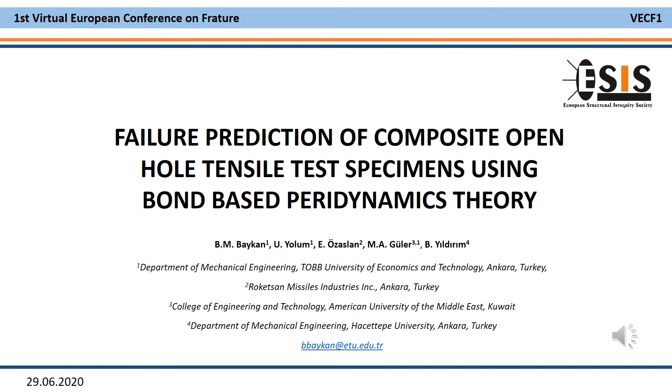Welcome to my presentation about failure prediction of composite open-hole tensile test specimens using bond-based peridynamic theory. First, I'm going to talk about studies done in the literature. Then I will tell you about the objective of the study, and I will continue with the method used for the solution, results, then discuss the conclusion, and finish with future work.

Peridynamics is a non-local theory introduced by Silling in 2000. A non-local theory is that a material point is affected by material points located in a region of a finite radius. Basically, peridynamics is a reformulation of the equation of motion in solid mechanics. The theory uses spatial integral equations, which make it easier to model discontinuities. The original peridynamic theory, invented in 2000, has been later called bond-based peridynamics.

Then Oterkuş and Madenci have presented an application of peridynamic theory to predict how damage propagates in fiber-reinforced composite materials under mechanical and thermal loads. Problems have been analyzed in fiber direction and arbitrary directions. Therefore, two peridynamic bond constants have been determined for each direction. Failure mechanisms such as matrix crack, fiber breakage, and delamination were examined. They came to the conclusion that peridynamic theory is successful for failure analysis of composite materials.

Kilic et al. did research on peridynamic theory using 2-ply and 3-ply laminates with different lamina orientations with a center crack. The peridynamic results were validated with experimental data. The failure mechanisms, matrix crack, fiber breakage, and delamination were captured by the prediction. The reported experimental results showed the ability of the peridynamic theory to realistically capture failure initiation and propagation in composites.

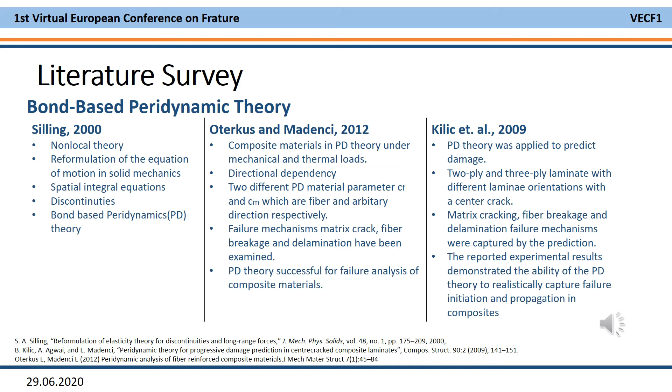Karakuzu et al. analyzed a woven glass vinylester composite material plate with two pin-loaded holes. The aim of this study was to investigate the effects of geometrical parameters such as edge distance to hole diameter, plate width to hole diameter, and the distance between two holes to hole diameter ratios on failure loads and failure modes. Problems have been analyzed experimentally and numerically. By increasing all three ratios, the ultimate load capacity is increasing.

Then Ghezzo et al. analyzed the stress distribution under in-plane tension loading between two open holes that were set parallel and orthogonal respectively with respect to the load direction for different symmetric carbon fiber laminates. They concluded that the stress concentration factor is not affected by the distance between the hole centers for specimens with holes located parallel to the load direction. Moreover, they investigated the minimum distance at which hole interactions begin for specimens with holes located orthogonally to the load direction.

The two-hole interactions for composite materials were studied by Ozaslan et al. Stress analysis and strength prediction were performed for carbon epoxy laminates with holes in specific orientations. To set a distance between two hole centers, interactions between two holes separated by several distances were examined. Hole center distances were set to 1.5 times the hole diameter. Experimental and numerical methods were used to predict final failure load. Point stress criteria and extended point stress criteria methods were used.

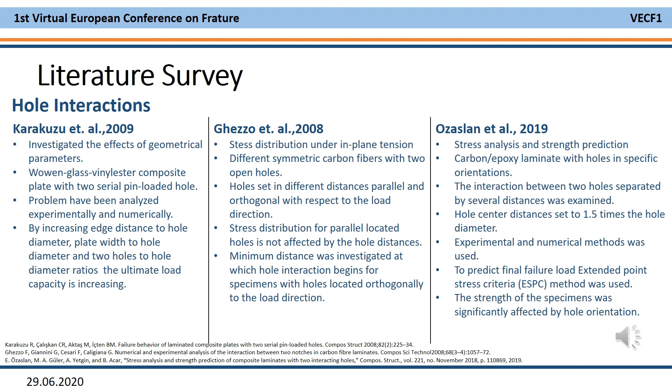The point stress criteria method is a stress-based failure criterion. According to this method, failure occurs when the stress at the characteristic distance away from the hole tip reaches the unnotched plate strength. The point stress criteria method cannot be performed when the critical region is in the highly nonlinear region. Therefore, this method is extended by using failure strength of specimens. The extended method was verified experimentally. The strength of the specimens was significantly affected by the hole orientations.

Three cases are examined. One is with one hole to the free edge, and the other two are interactions between two holes separated by several distances. The material used is carbon epoxy laminates with the orientation given. Stress and displacement calculations have been done with finite element methods in ANSYS. The finite element analysis stress results have been validated with results of Ozaslan et al.

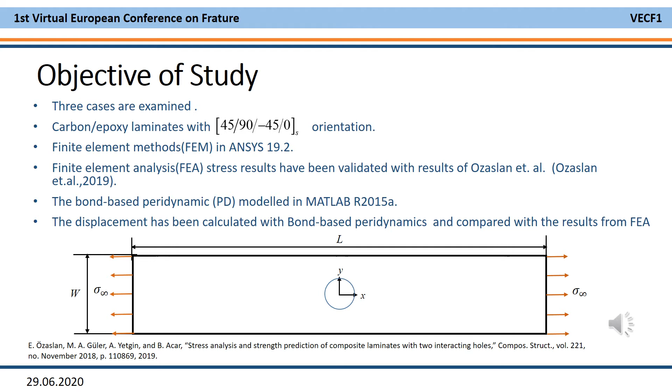The bond-based peridynamic model has been modeled in MATLAB. The displacement has been calculated with bond-based peridynamics and compared with the results of finite element analysis. The model is shown in this figure. As you can see, the coordinate system is in the center of the plate, and the pressure is applied on the short edge in x direction.

Three cases have been studied. The path is defined perpendicular to the applied load. First case specimen is OHT1 with centered hole. Its path 1 is from hole edge to plate free edge.

Second case specimen is OHT2-1 with two holes at x equals 0. Its path 2 is between two hole edges. The distance between holes in y direction is 3 times the hole diameter.

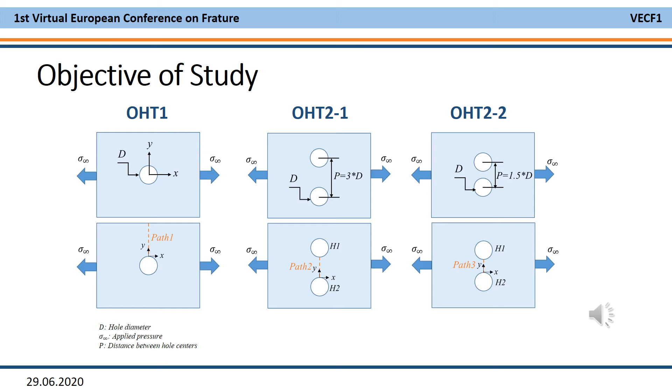Third case is specimen OHT2-2 with two holes at x equals 0. Its path 3 is between two hole edges. The distance between holes in y direction is 1.5 times the hole diameter.

Carbon epoxy laminate is analyzed. The orientation is given. The laminate has 8 plies and is symmetric. In-plane engineering constants are calculated for the bond-based peridynamic code and finite element method. In-plane engineering constants are engineering constants due to the global coordinates. The constants are calculated from the extensional compliance matrix.

Since the laminate is symmetric, the coupling stiffness matrix becomes 0. The extensional compliance matrix is equal to the inverse extensional stiffness matrix, and the bending compliance matrix is equal to the inverse bending stiffness matrix.

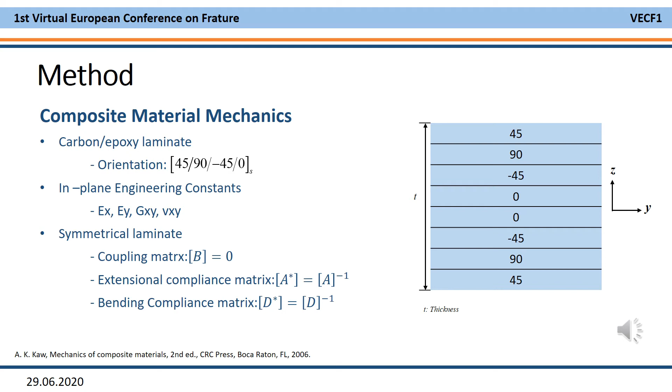In the bond-based peridynamic code, the peridynamic mesh is defined by material points and their bonds with other material points inside the horizon. Horizon is determined as 3.015 times the spacing between material points. For the x material point shown in the figure, the other material points inside the horizon are the x material point family. For making holes with the peridynamic mesh, the material points inside the hole are erased and formation of material bonds is prevented.

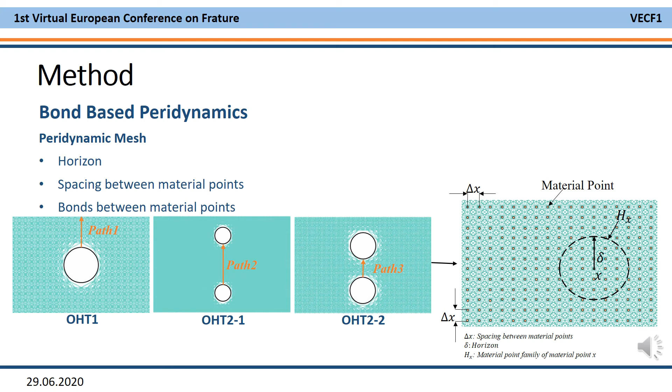Peridynamic bond constant. One bond constant for isotropic material is defined. Because an isotropic material is independent of directions, isotropic bond constants depend on elastic modulus, horizon, and thickness. Composite fiber reinforced materials are directionally dependent. Therefore, two bond constants are defined. One in fiber direction, the other in arbitrary direction.

The bond constant in fiber direction depends on the stiffness matrix, which is calculated by orthotropic engineering data, and initial distance. The bond constant in arbitrary direction depends on the stiffness matrix, horizon, and thickness.

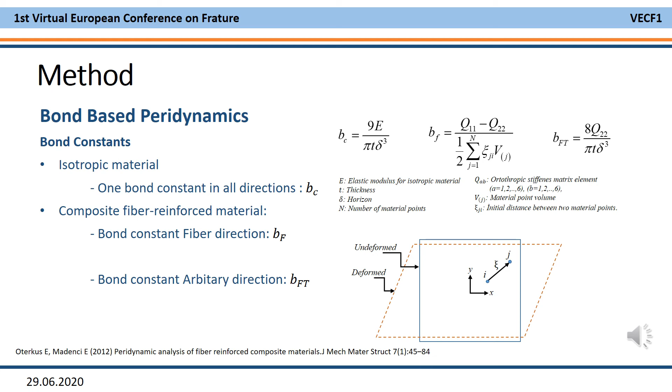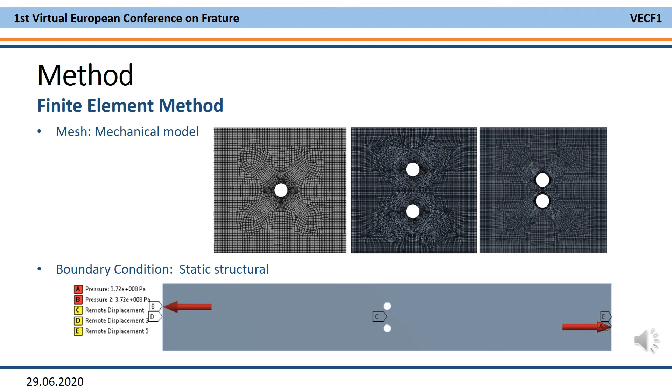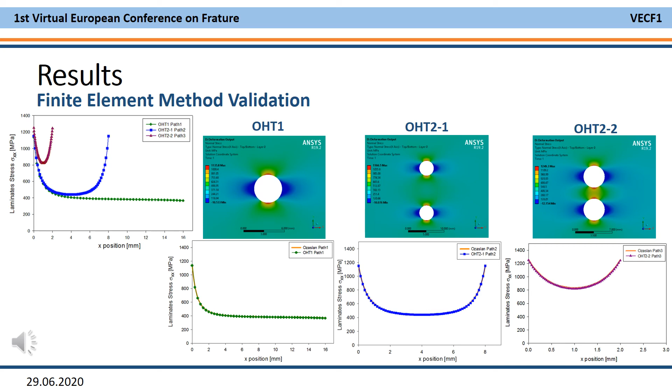Finite element method validation is done with Ozaslan et al. The validation is done separately for the three cases. On the laminate stress in x direction contour and on the laminate stress to x position figure, it's clearly seen that the holes in OHT2-2 specimen do interact. The maximum stress occurs on the hole edge for all cases.

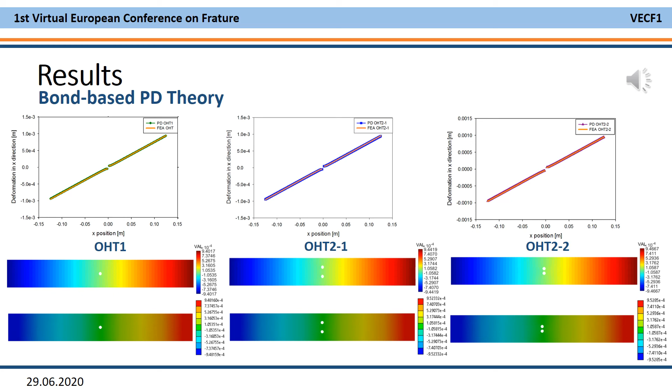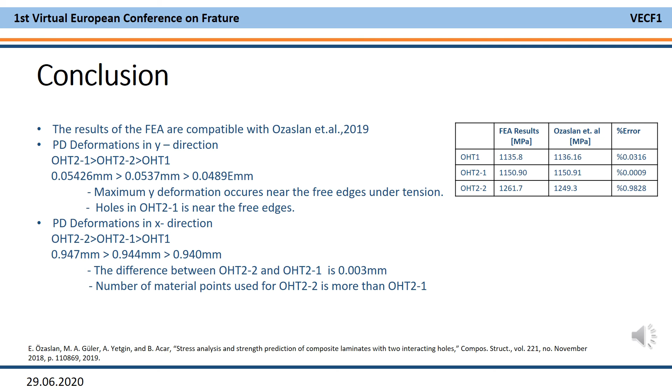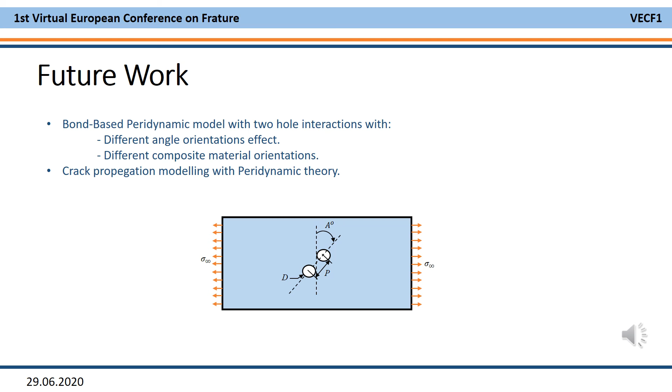In the future, the bond-based peridynamic model with two hole interactions with different angle orientation effects and different composite material orientations will be analyzed. The crack propagation will be modeled for each angle and material orientation. As shown in figure, angle A is added to the model.